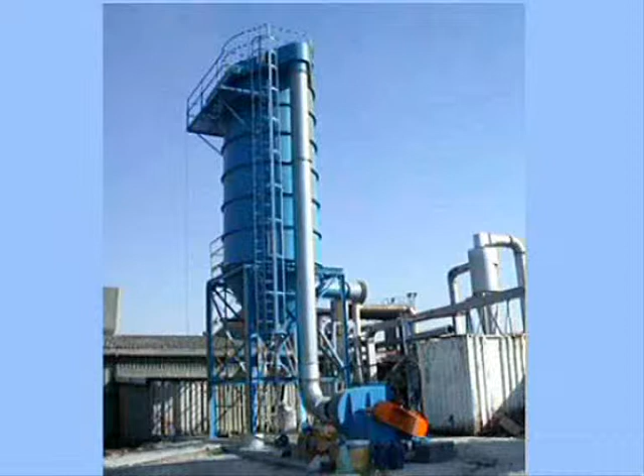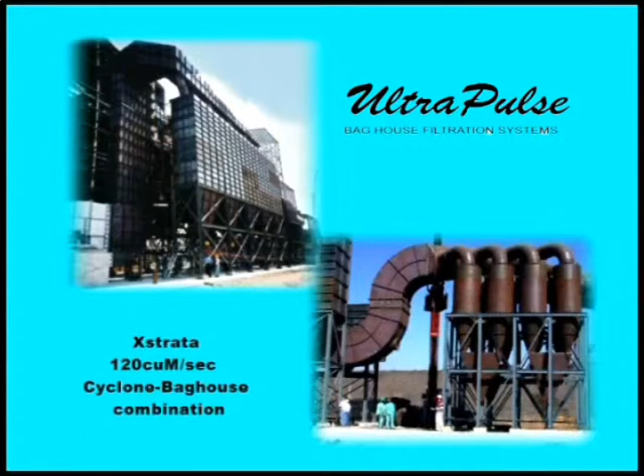So, what in fact is C-Series? And why is it infinitely more efficient, yet less capital intensive than standard cyclone baghouse combinations, or even standalone baghouses without pre-cyclones?

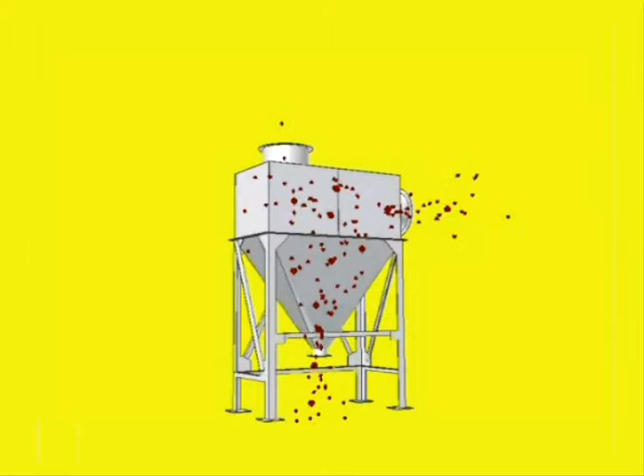With a dropout box, air and dust are blown or sucked through the box so that the velocity of the air-dust mixture is drastically reduced compared to the velocity in the duct. The theory is that the cross-face velocity will be too slow to carry the dust across the box, with the dust then falling out of the airline.

Unfortunately, kinetic energy, inertia, amongst other engineering and scientific principles, defeat this theory to a great extent.

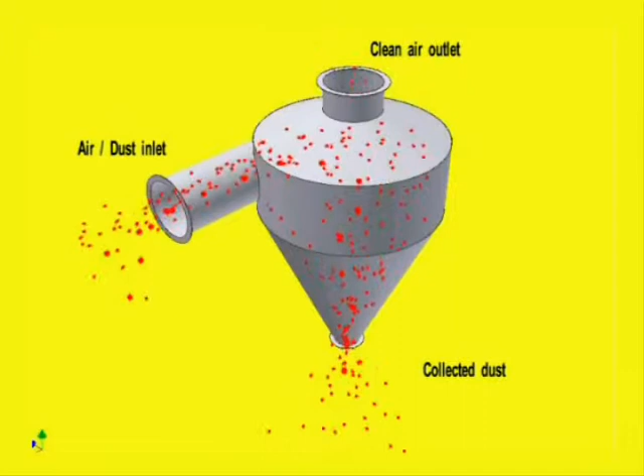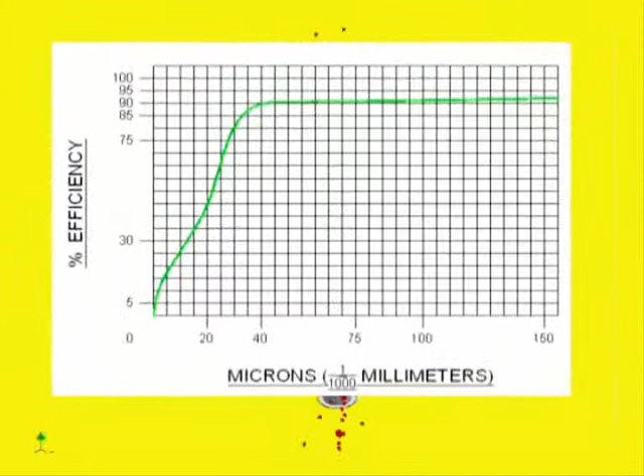Because of the centrifugal motion set up in the cyclone, most of the dust is effectively spun out the bottom of the cyclone, with only the smaller fraction passing through the system to the clean air outlet. Now make this into a high-efficiency slimline battery-type cyclone, and the efficiency grows to 90% of particles over 40 microns.

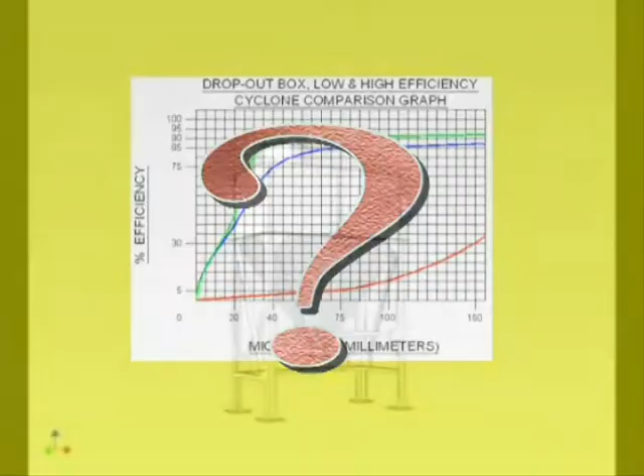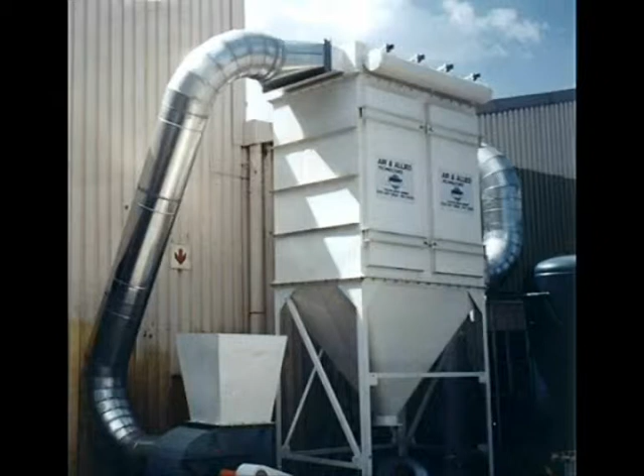Okay, so what has this to do with the C-Series? If one were to take a dropout box, increase the height of the unit, and add filters, this would be the design of a standard baghouse as manufactured by A&AT and all other baghouse manufacturers.

The vast majority of the dust still flows straight through the hopper, or dropout box, directly into the filters with minimal dropout taking place, no matter how the dust is introduced. The bags do all the work.

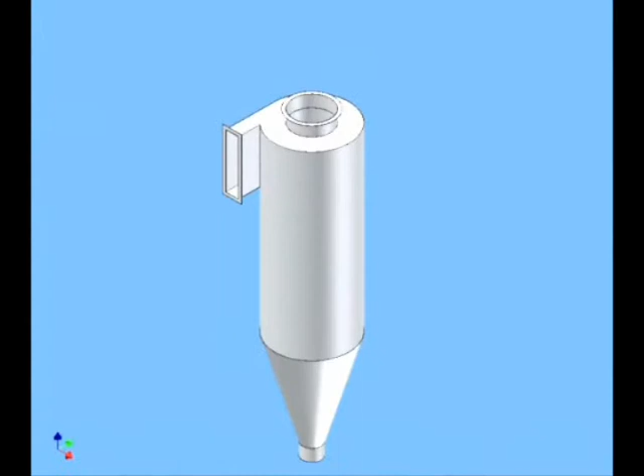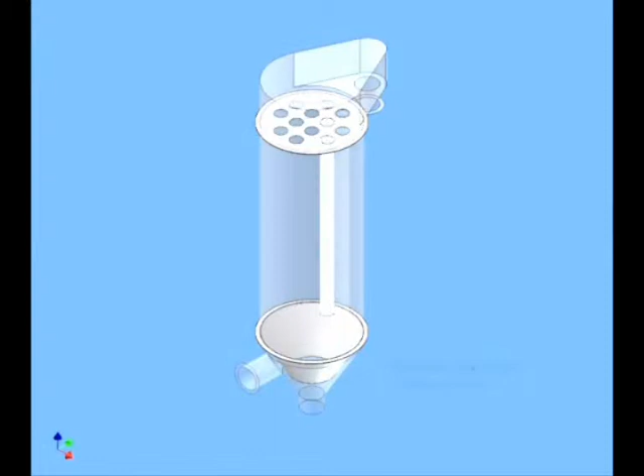Now, take a high-efficiency cyclone and build a baghouse on top of it. Then greatly increase the cyclone efficiency through the patented C-Series double cone system, which creates an infinitely decreasing annulus. And only a minimal amount of the dust passes into the bag section.

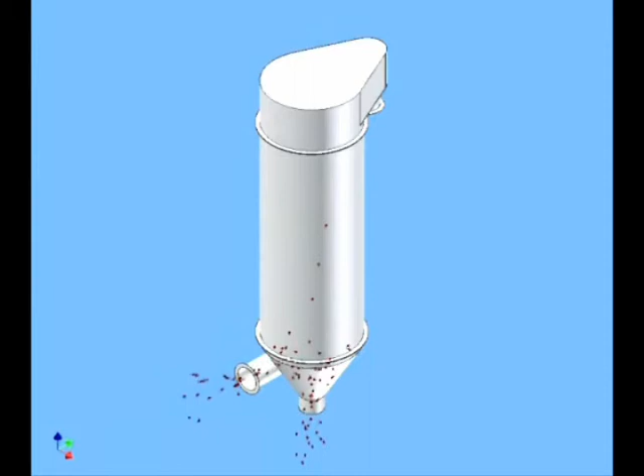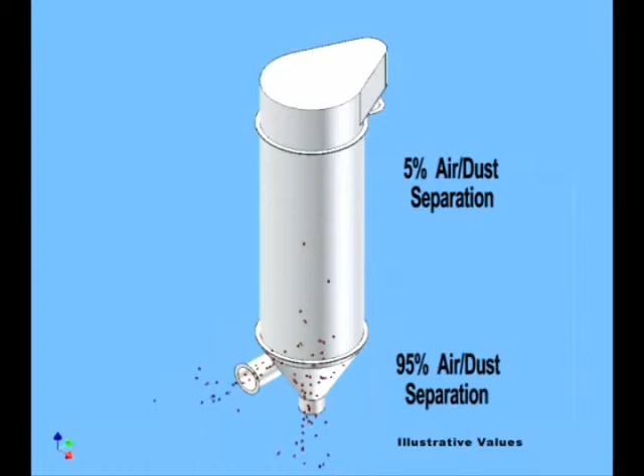In fact, more than 95% of the separation work is done by the C-Series hopper without any filters, leaving the filters to separate only the minimal ultrafine particulate from the air. And all this in a single dust unit, combining primary cyclone and secondary baghouse technology.

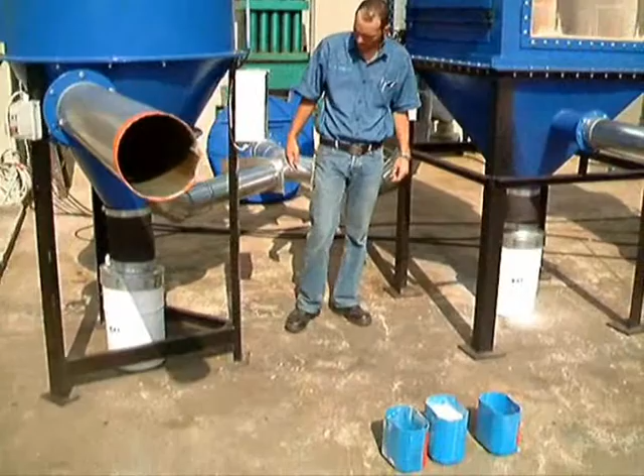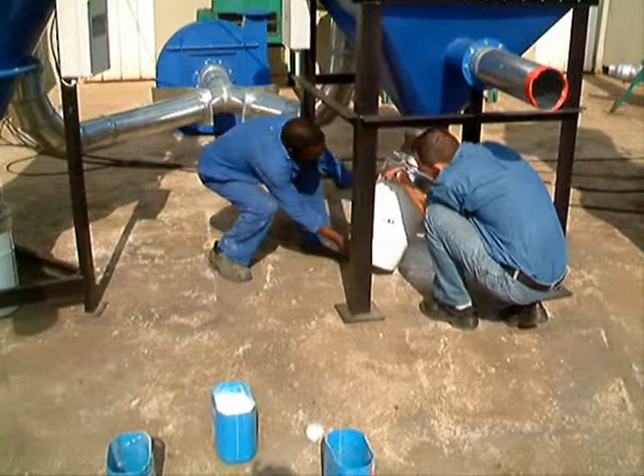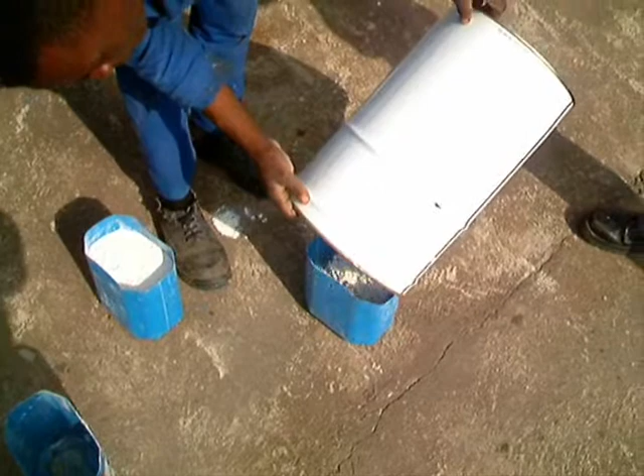Can you see that? Yeah. Okay, that one.

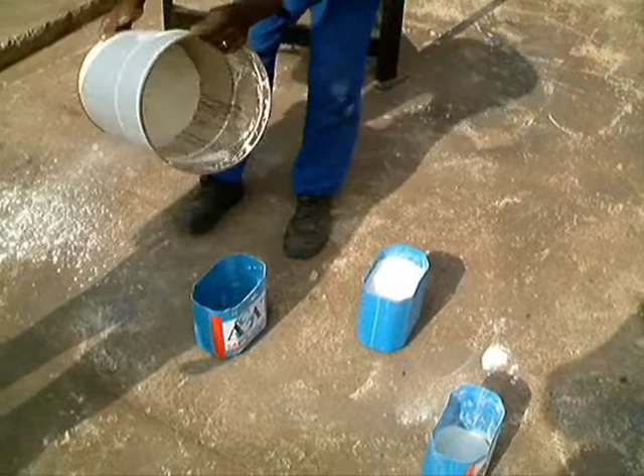Put them next to each other.

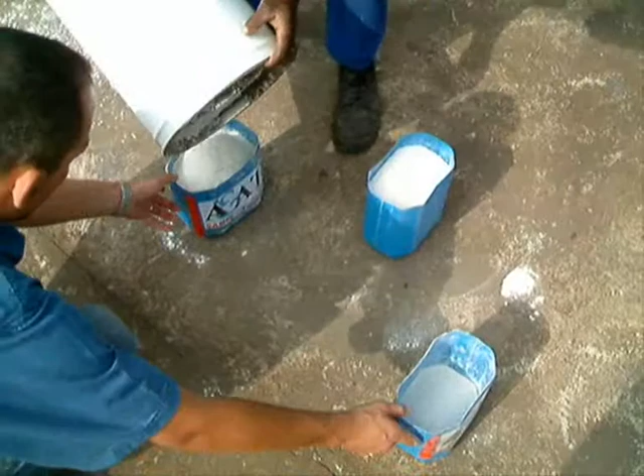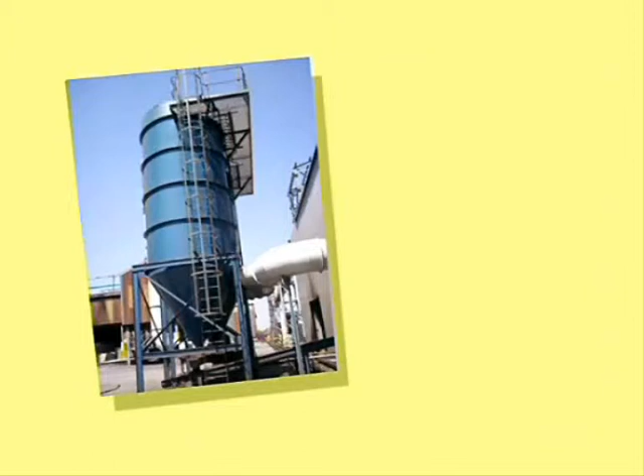What this now means is that the filter velocity in the C-Series can be redesigned due to the light dust load on the filters. The pulsing of the bags can be reduced accordingly, leaving minimal wear on the bags and pulse valve system. The bag and valve life is greatly increased, and consequently replacement and running costs much decreased.

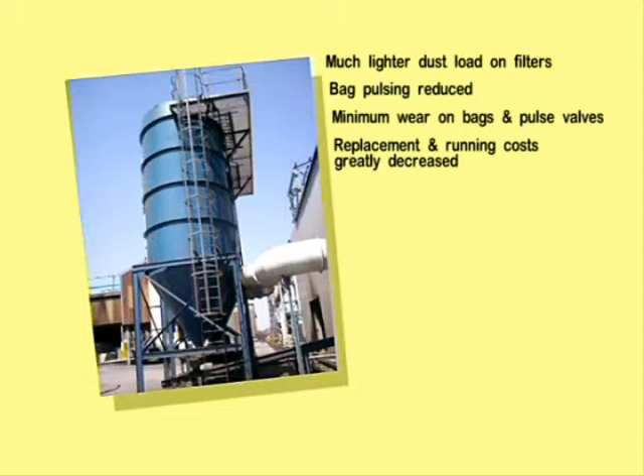Another great feature of the C-Series is its round shape, allowing it to handle far greater internal pressures than square section units, and with smaller footprints, taking up less valuable space.

In heavy applications, single dust discharge for both heavy and light collected dust greatly cuts down the dust removal cycle or the screw conveyors that would normally be needed.

And the C-Series is not only less maintenance intensive, but capital costs are, in most cases, far more favorable than standard baghouse systems, making it a winner in every way.

This compared to a standard plant with primary cyclones and secondary baghouse, as has been the norm until now.